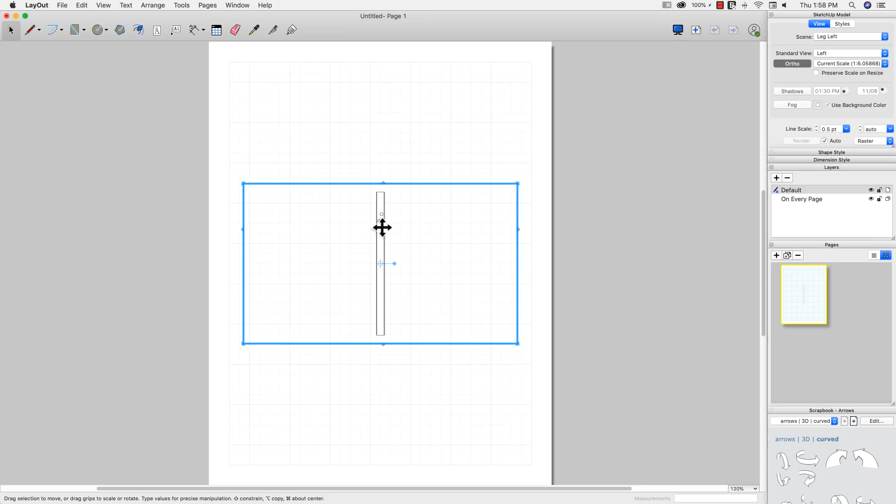So we're going to create two pages, one for the leg and one for the front. This first one pulled in - if I right click and go down to scenes, it's going to show me the view I called leg left. So I'm going to switch to leg front real quick. All right, there we go.

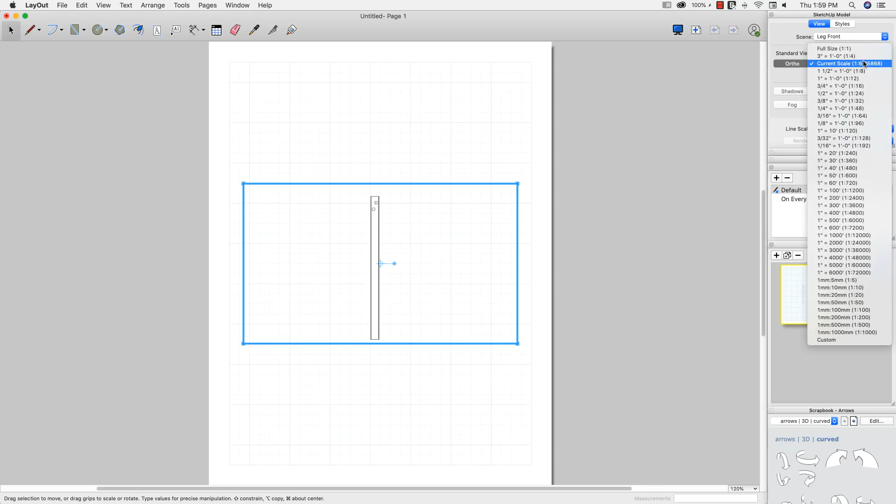Right now this is being shown at a scale of 1 to 6.05868, not real easy to pull a dimension off of if I'm missing something. So I might come up with a better scale, like maybe a 1-to-1 scale. One inch equals a foot - no, that's a little too small. Three inch equals a foot, let's see how that works. All right, that's going to work.

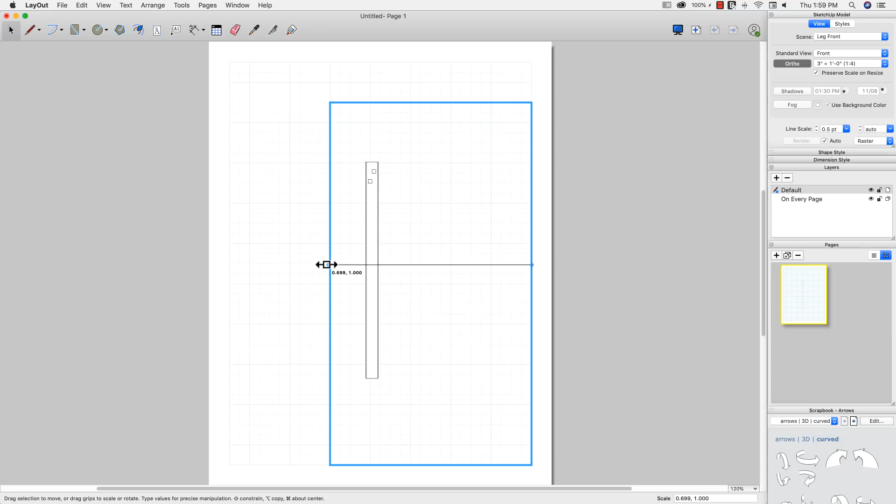So this is my front view. What I might do - and again, at this point we're crossing into that 'what you could do' category, if you know what I mean. We're not doing stuff where I'd say you absolutely have to do it this way. We're going more into the realm of thoughts on ways you could present this. So each of the four sides of my leg is different, so I'm going to set this up at my 3 inches equals a foot, 1 to 4 scale.

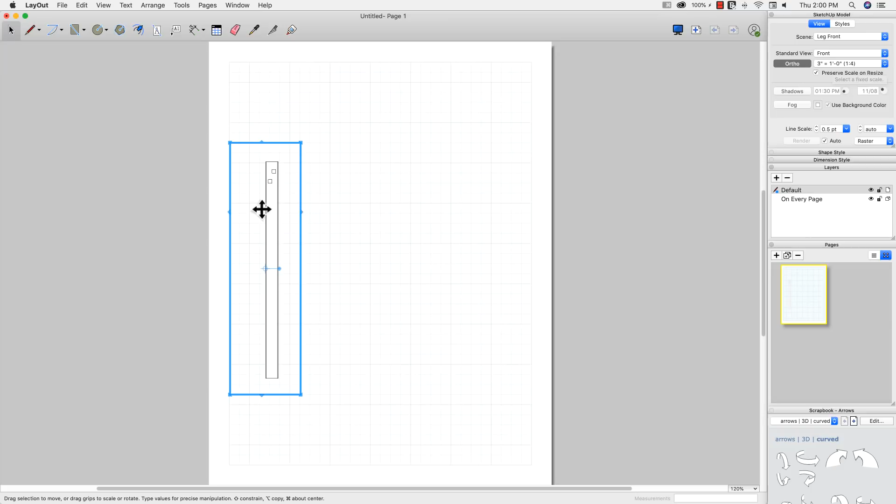And I'm going to copy and paste, and paste, and paste. So now I have four total copies of that viewport, and they're all just sitting on top of each other right now. By grabbing them one at a time and sliding them directly to the right, one thing I assure is that all my lines line up, if that makes sense - all of my perpendicular lines. If I had to put a dimension here to here, it would be the same all the way across because they all line up.

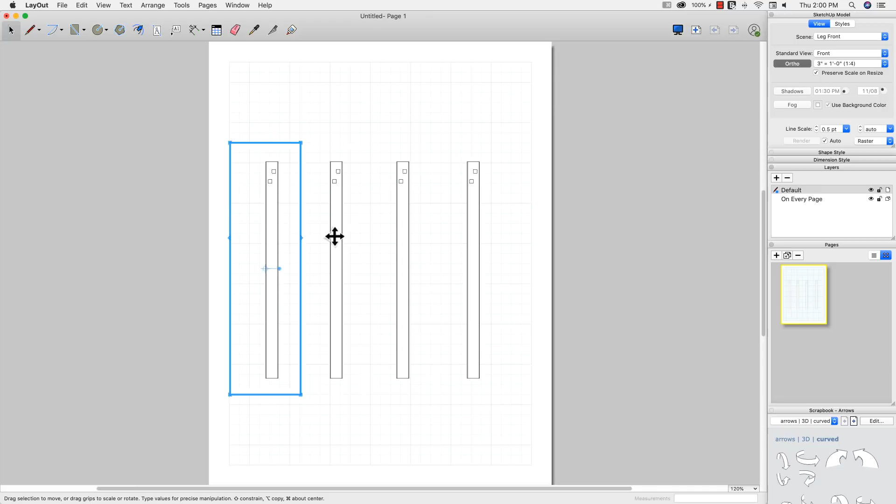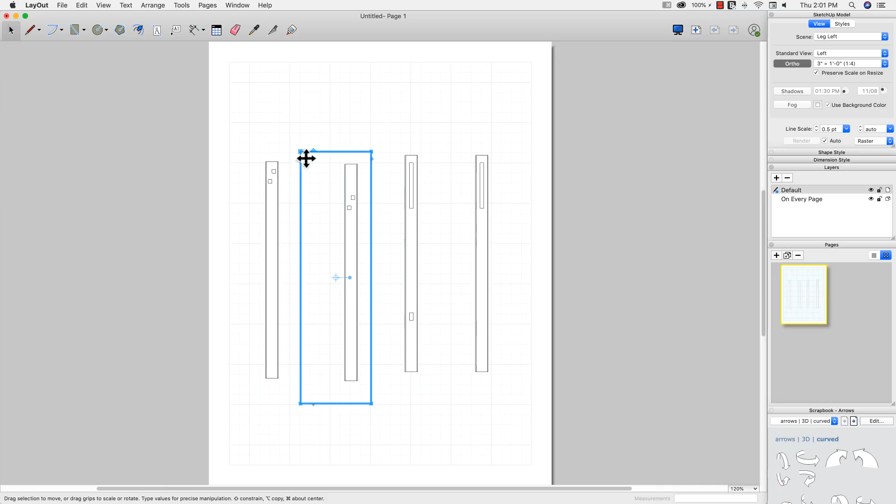Now I have this one right here, which is my front. I'm just going to come through here, right click, and go to my scenes one at a time. I'm going to go left side, I'm going to go to the back, and I'm going to show the right side. So there's each of the different sides. One of the things you probably noticed right now is that they actually stopped lining up.

This is one of the things that happens if you're not super careful about how you create your scenes. You can see these two were created from the exact same scenes - they actually lined up perfect. These ones didn't quite do that, these ones were a little bit off. That's because I moved the camera, which some would refer to as a cardinal sin.

So what ended up happening was I created my first one - you can see my other sides - I actually moved the camera for it. These three all line up, this one's a little off now. So what do you do when this happens?

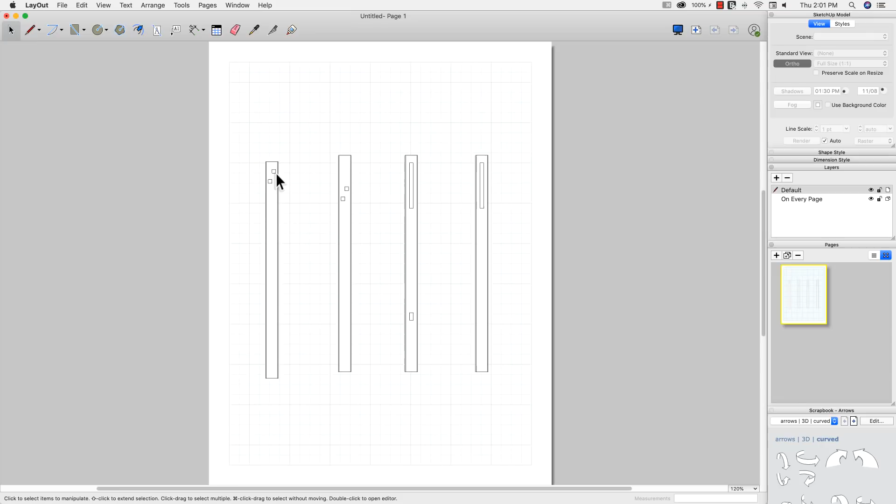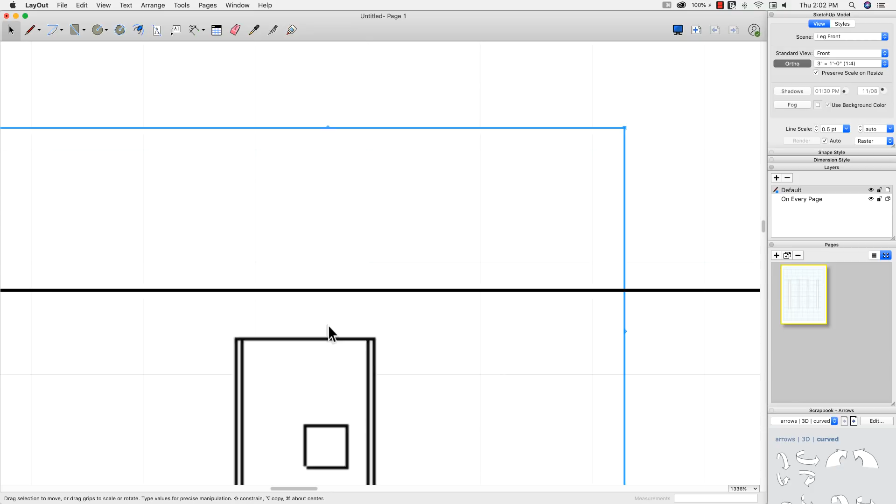Because this is reality, my solution is to just grab a line, put it in here, and then I can actually take this now and line it up with that line. Something you may have noticed right there is that my lines are not very pretty right now.

One of the other things I will do at this point is take my drawings, my SketchUp models, and change them from raster to vector. It does remind me that could take a little bit longer to render, but that's okay - I want nice sharp lines for my drawings.

At this point, the amount of information you want to include on here is up to you. So I might want to come in here and label each of these. I'm going to come in here and say this is my front.

And then I like to copy things as much as possible. One of the advantages to copying is I can keep stuff lined up very easily by just moving it along with the inference snaps. If I draw a new one each time, which is fine, I'll have to go through a little more work to line it back up.

So this one I can say is my left. This one I can say is the back. And then this one is the right. These terms are a little bit subjective because I'm the one that's determining what is the front, back, left, and right.

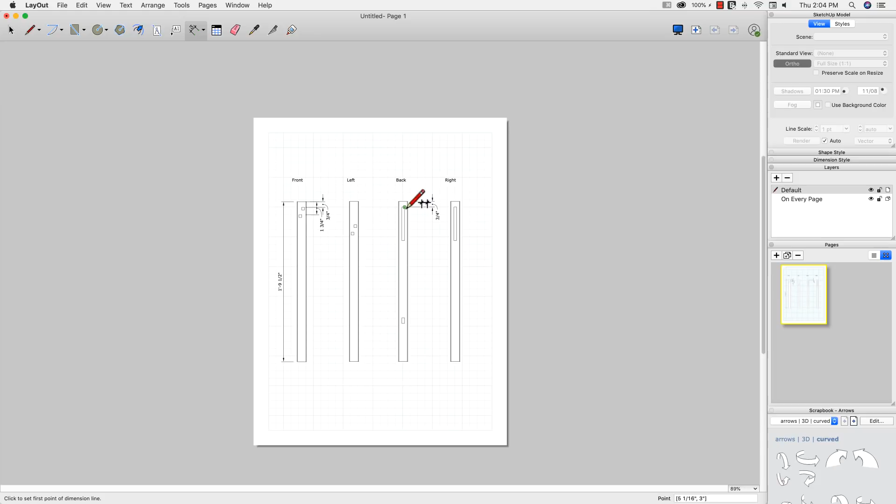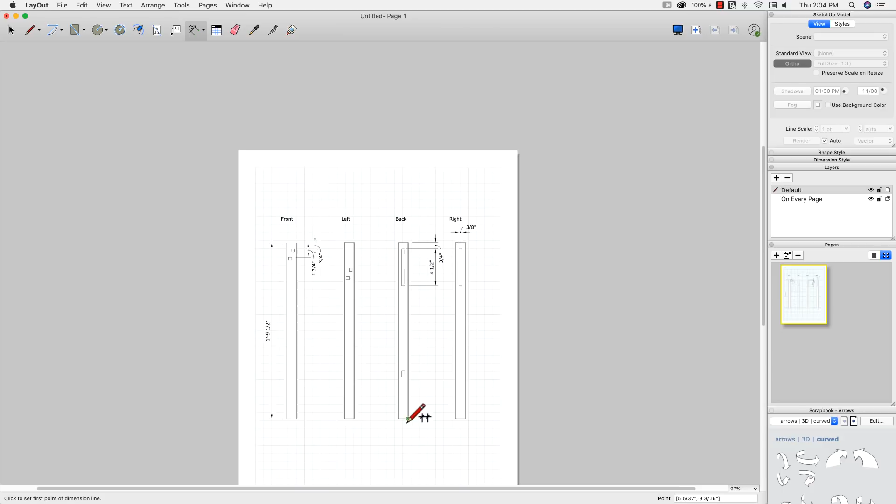Since this one's the same, I don't have to actually dimension both, but I might come in here and put in the horizontal dimension of that opening. Same thing down here - we've got another little opening right here.

You see I'm just clicking point to point and then sliding, so you can go across like that. It doesn't matter because when you pull it out like that, maybe one more showing the dimension of that cut. And then of course location of these two peg holes might be good as well.

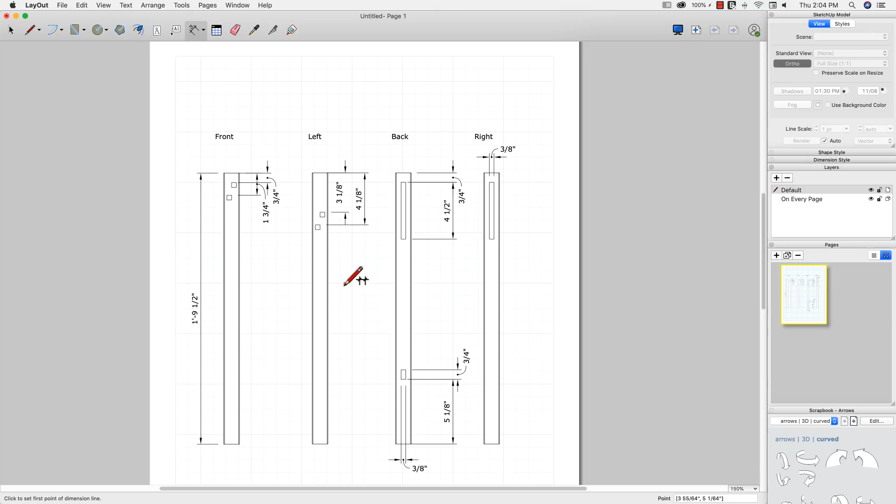And then maybe these are square, but maybe I'll just throw a single dimension on here that shows these are 3/8 of an inch by 3/8 of an inch.

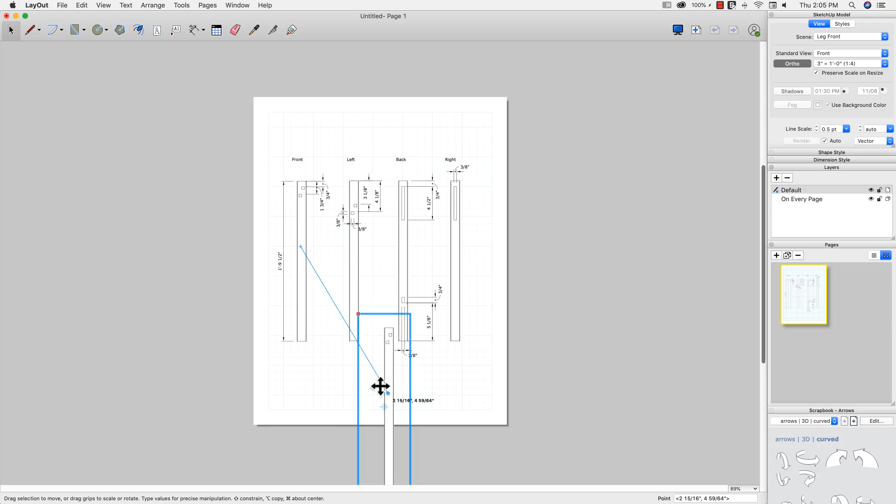And finally, I may do one more viewport here. I'm going to copy and paste this one last time, and move it right here. And I'm going to change my view, my scene, to the top, because this is the exact same scale now.

I have a top view, which is going to be important because there are some cuts on here. They're not perfect squares - they're actually notched on each corner. So I do want to add the information that I need for making those cuts.

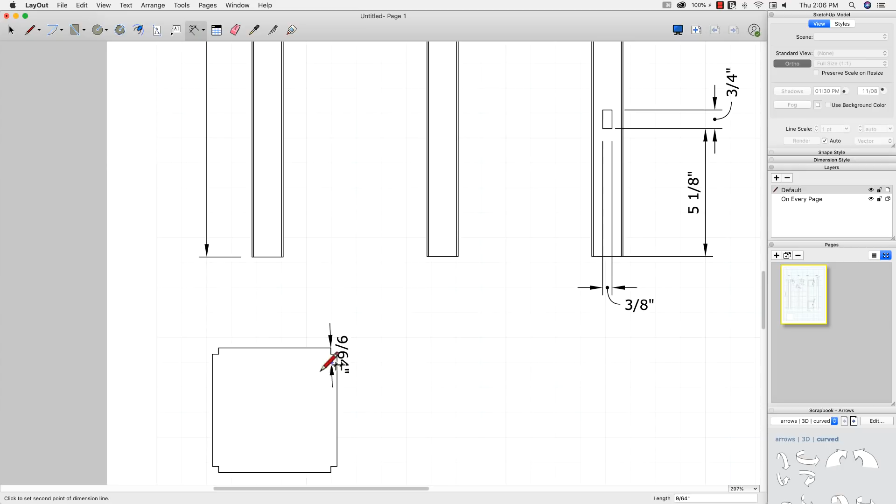Because this ends up being kind of small, I may actually take this one and go to a bigger view - maybe go to full size on this, and then put my dimensions in for these details right here.

So at this point, you have to make the decision: how much information do I need on here? Am I just taking this out to the shop? If so, that might be enough information. If this is something that maybe I'm selling or redistributing, then I may have to come in with more information.

One of the things I didn't touch on, of course, is the title block. We didn't put additional text information on here, page numbers, anything like that. But that's the level of detail that you want to decide on including yourself.

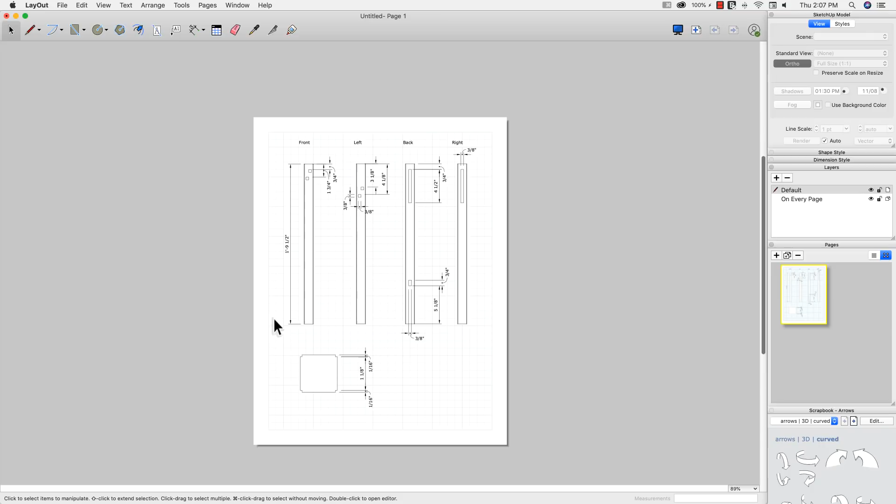What I really wanted to point out here was how to use those scenes we created to set up this view of the leg so that I could actually take this and fabricate it if I needed to.

So hopefully that helped - hopefully that was something useful as far as what's that next step in the process. At this point, we start to talk about deliverables and it gets a little bit subjective - what do you actually want, what do you need, that sort of thing. What I wanted to do is not get bogged down on the exact every little piece of how you should dimension things, and really show you the general flow of what that process would look like, creating those viewports and copying them.